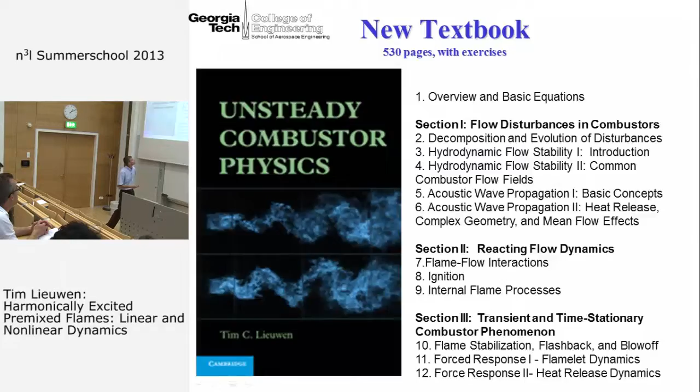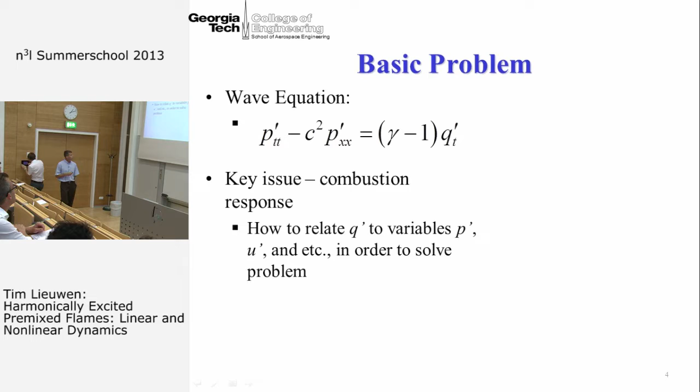If you really distill it down, the basic problem can be boiled down to a wave equation, which I have on the left side here, being excited by a source. Really one of the key issues in understanding combustion instabilities is understanding the combustion response, the sensitivity of unsteady heat release to flow disturbances in the system. So how do we relate Q prime, where Q prime is my unsteady heat release, to fluctuations in pressure and velocity and so forth. Once we can do that, then we can solve this wave equation.

By the way, I always wonder - I don't know what happens in Germany, but in the United States, students sleep in the first talk after lunch, especially now that the lights are dim. In fact, I slept when I was a student. So now when I teach, I always tell people I understand everybody has a hard day, and I let 2 people sleep, but only 2. The third person, I tell them they have to coordinate among themselves and say who's going to sleep, because then I start to take it personally if there's more than two people sleeping at any given time.

So the focus of this talk is the sensitivity of heat release to flow disturbances. By flow, I'm talking about velocity, mass flow rate. If I have fluctuations in the flow, how does this lead to oscillations in heat release? This is the question I want to dig into.

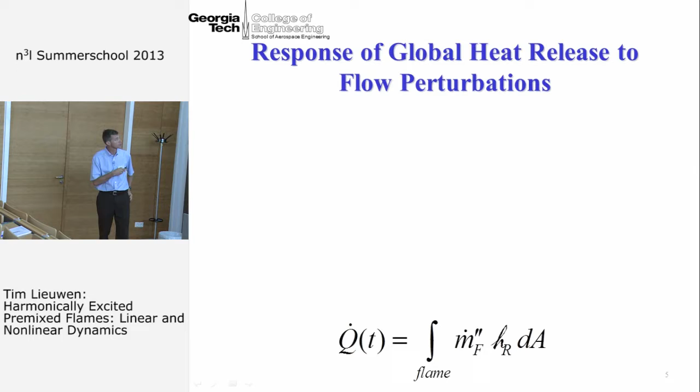So I'm going to talk about the local response of flames in the first half of this talk—when I perturb a flame, what is the space-time dynamics of the flame sheet position? Then I'll talk about the global response, which is the spatial integral. There are lots of questions we can ask, and I'm only going to barely scratch the surface.

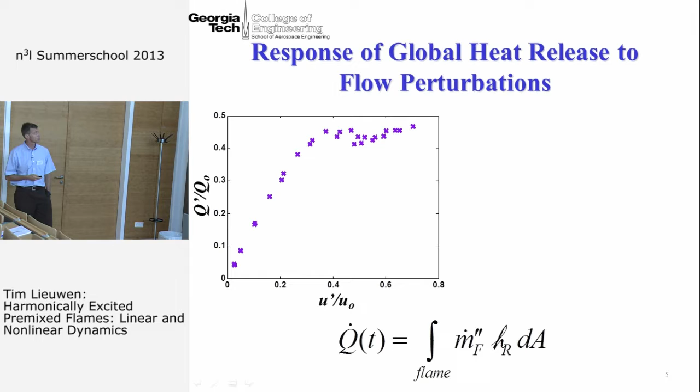I know a number of things that Dr. Paschereit later today is going to be addressing, as well as others tomorrow.

In a nonlinear situation, in this particular case, we have a very strong saturation. Why is it saturating? What are the physical processes? Why is it saturating at this amplitude—in this case, about 40% of the mean heat release? But other data might saturate at 10%, or in other cases up at 100%. So why at that amplitude? These are some of the questions we're interested in addressing.

Professor Polifke asked me to provide some background on the basic equations we're going to be using. Before I talk about flame dynamics, I want to take a quick sidelight and walk through the analytical tools and governing equations we'll use to look at these dynamics.

What I'm going to do is work within the fast chemistry limit, assuming I'm working within the flame-let approximation. So in a premixed flame, that means the flame is a very thin sheet, and I'm basically going to collapse all the complex chemistry into a discontinuity.

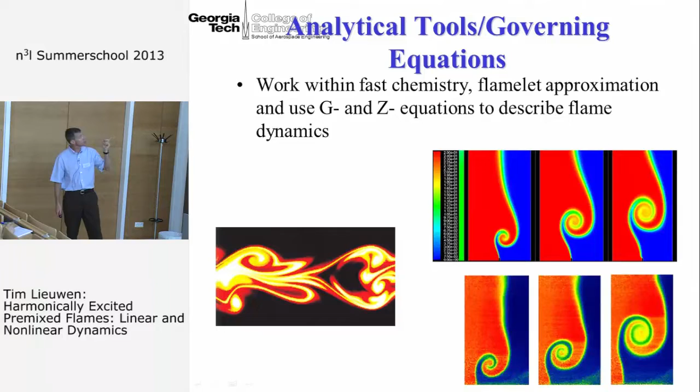And in the non-premixed flame, it also is a thin sheet. So I'm going to use the G equation to describe the premixed flame and the Z equation to describe the non-premixed flame, and I'll explain to you what those are. Just a very quick derivation: the Z equation is going to be my equation to understand non-premixed flame dynamics.

The key assumptions I'm going to be making for this analysis are, first of all, I'm going to assume Lewis number is 1 and that the flame occurs at the Z stoichiometric, or the stoichiometric mixture fraction surface. So Z is my mixture fraction. And I'm also going to assume equal diffusivities.

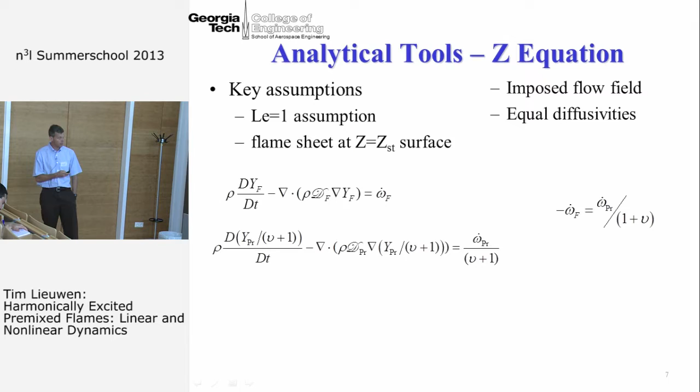And as I'll mention later, the first studies that I'm aware of that use the Z equation to understand the dynamics of non-premixed flames responding to harmonic flow disturbances was actually the work of Professor Sujith. And then actually applied to understand systems by Professor Juniper, both organizers of this meeting. So that's the Z equation.

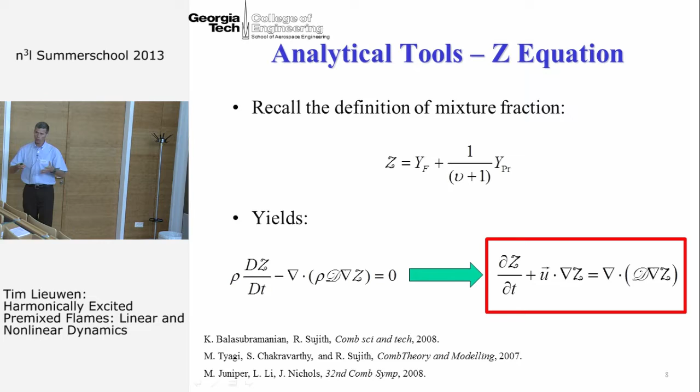So I want to understand, in essence, what I'm looking at is if I perturb the velocity field, this U, how does the flame both locally respond, how does the Z stoichiometric surface respond, as well as how does the heat release respond. Now I can do the same thing for a premixed flame.

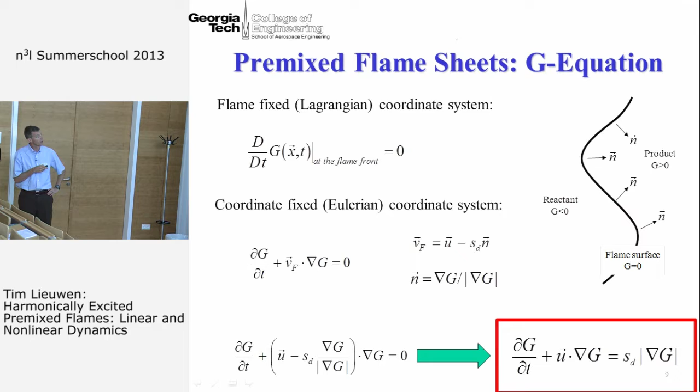And there I'm going to use what's called, and these letters are made up, but I'm going to call it the G equation, for historical reasons. In the G equation, again, I won't go through the derivation, but basically what I end up with is an equation of this form, which describes this scalar field G, and the flame is described. All the interesting stuff, all the chemistry, is packed into this surface right here, which is where G is equal to 0. In the reactants, G is less than 0, and in the products, G is greater than 0.

But it's important to realize, and I'll get into this in a minute, in a non-premixed flame, Z is physically meaningful everywhere. It's the mixture fraction. The mixture fraction is the amount of mass of stuff that originated in the fuel jet normalized by the total mass. In contrast, the value of G doesn't really have a physical correspondence when you're in the reactants or the products. It only has physical correspondence at the flame, where G is equal to 0.

So this is an equation that describes the propagation of this scalar field G, and then what I need to do is extract where G is equal to 0 to figure out where the premixed flame front is. And again, what I have is a convection operator on the left-hand side, which is just the flow velocity pushing around iso-G surfaces.

And then, as opposed to the non-premixed flame where I had a diffusion operator on the right-hand side, here I have a propagation operator. So S_D denotes basically the flame speed, the displacement speed, the speed of the front. And this mag-grad-G basically means that the front is propagating normal to itself. So at every instant, the front is propagating normal to the G equals 0 surface.

So one more simplification that we're going to make for the G equation: I'm only going to look at two-dimensional flames for this discussion. And the other thing that I'm going to do is, here's a sketch — this is an instantaneous position of my flame. I'm going to assume that the flame position is a single-valued function of the coordinate y, so then the flame position is given by this function xi of y and t. Obviously, if the flame was rolled around and wrapped around, I couldn't do that if it was a multi-valued position.

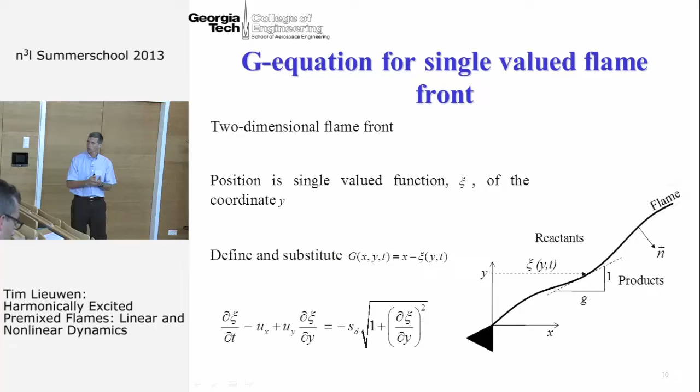So, kind of a nasty nonlinear right-hand side. This is my flame propagation term, and this is the part that describes convection of the front by the flow. So we have convection of the flame getting moved by the flow on the left side, and the flame propagating normal to itself on the right-hand side.

If we take these two equations, it's interesting to compare and contrast them. On the left side, you can see we have the same convection operator — they basically look the same. And what that tells us is that wrinkles are created on these surfaces, either on the G equals 0 surface or on iso-Z surfaces, by velocity fluctuations normal to iso-G or iso-Z surfaces.

The right-hand side, things look different. We have the diffusion equation, a diffusion operator — this is a linear, or at least a quasi-linear operator. Whereas the premixed flame shows a very strong nonlinearity here, and this describes, as I mentioned, flame propagation.

Something interesting is that the right-hand side of both of these equations becomes essentially negligible in the non-premixed flame, in the Peclet number much, much greater than 1 limit. So when characteristic velocity times a characteristic length scale, divided by the diffusivity, becomes very large, this term becomes pretty small. Or in the premixed flame, when the flow velocity is much, much greater than the flame speed, this also becomes negligible, at least in certain regions in space.

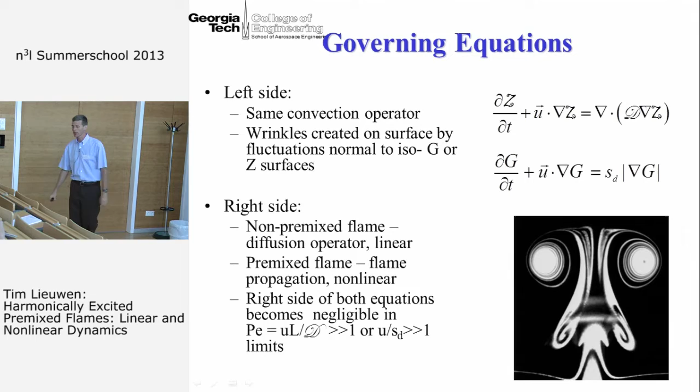So what that means is in that limit, these equations are actually quite similar, and we can expect some similarities in the space-time dynamics of the flame position in these limits, as I'll show you from some exact solutions later on. But as I'll also show, the fact that there are some analogies or similarities in the local space-time flame position dynamics does not necessarily mean the dynamics of the heat release are the same — they're controlled by totally different features.

One other point I want to make, and I mentioned this already, let me make it one more time: the G equation is only physically meaningful at the flame surface, where G equals 0. That allowed us to make the substitution we did here. But notice that this substitution is, in essence, arbitrarily assigning a value to G away from the flame position.

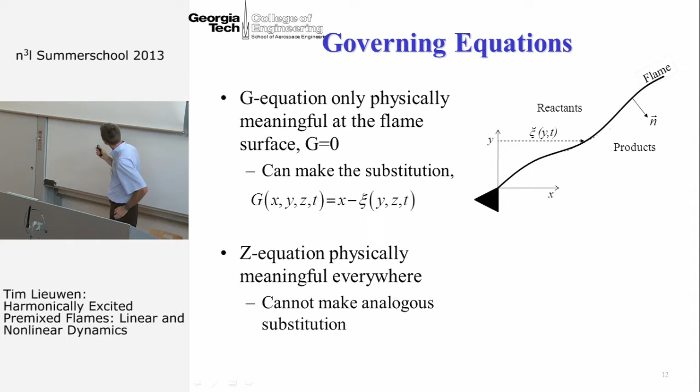G is less than 0 in the reactants, greater than 0 in the products, but I'm arbitrarily assigning some value of G. I can't do this — I can't make this substitution into the Z equation, because I'd be assigning a value to Z away from the flame, and I can't arbitrarily assign a value to Z. I've got to solve for the value of Z.

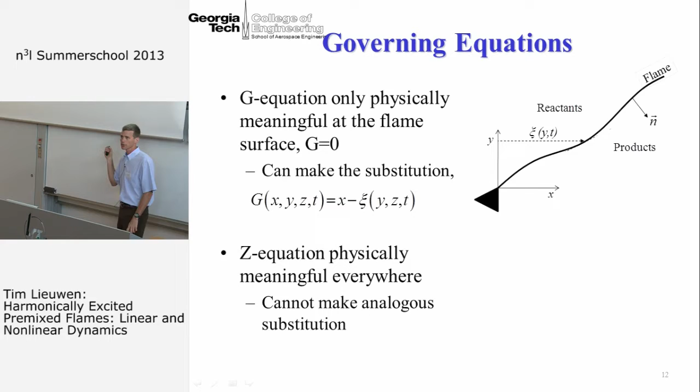So although the G equation is actually this nasty nonlinear equation, a nice simplification is that I can explicitly solve for the flame position in this 2D, single-valued approximation — I can write an equation for the flame position, xi. You cannot do that in the non-premixed flame case. The Z equation is physically meaningful everywhere, so you can't make an analogous substitution. That really reflects a fundamental difference in the problem.

Okay, so that's just kind of a quick overview of the governing equations.

I just threw in one last slide, some references for you to look at, which really walk through the approach that I'm going to use, and I wanted to point them out to you. These are some milestone studies, and I'm probably missing one or two here, but these are ones that jumped out at me as I was preparing this.

First of all, there's a very nice work in Markstein's book, Nonsteady Flame Propagation, where he basically, for the first time, derived the G equation. Forman Williams made it rigorous in 1985, but Markstein was the one who really presented this equation which you could use to start solving for flame sheet dynamics.

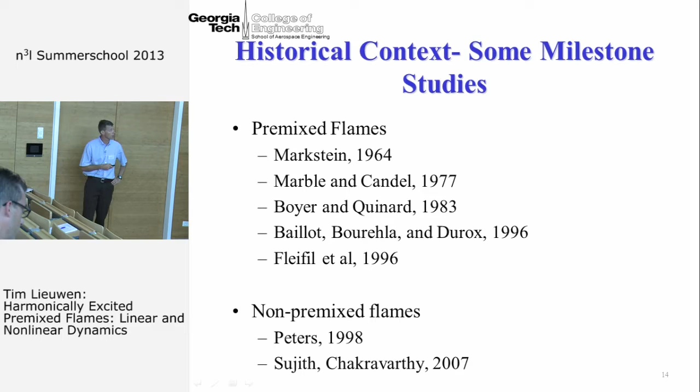And then in non-premixed flames, first of all, the work of Peters to rigorously develop this Z-equation framework within the flamelet approximation, and then Sujith and Chakravarthy at IIT Madras to actually use it to understand how flames respond to harmonic flow disturbances.

Okay, so with that as background, the rest of my talk is organized into three parts. I want to talk about premixed flame local dynamics, then non-premixed flame local dynamics, and then I'll talk about global heat release dynamics.

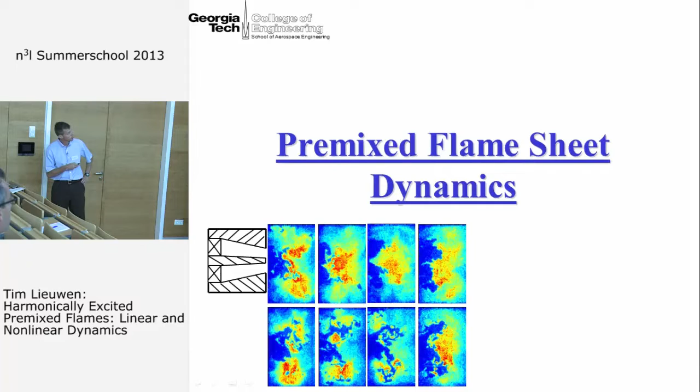So first we're going to talk about space-time dynamics. This is a much more complicated situation than I'm going to talk about. This is some OH PLIF images of a swirl flame. But if you think that instantaneously the flame is this interface, what are the factors that control the space-time fluctuations of the flame as we evolve in time? That's what I want to talk about.

If we go to a higher amplitude of excitation, it's very clear here to see the coupling of the flame with hydrodynamic flow instabilities. You're really strongly exciting the Kelvin-Helmholtz instability of the shear layer, which is strong enough to actually start whipping the whole flame around and rolling it up. And you can see, as you watch this, the action of kinematic restoration, which is the propagation of the flame normal to itself, smoothing itself out as you move downstream.

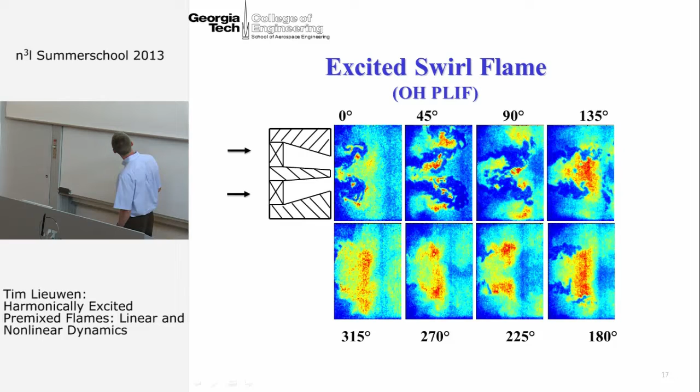So these are just some typical images of what harmonically excited flames look like. As I said, they can look a whole lot more complicated. This is a swirl flame with an OH PLIF image. I really like this one right here. You can see the large-scale roll-up of the flame, the Kelvin-Helmholtz instability of the outer shear layer right there, and the Kelvin-Helmholtz instability of the inner shear layer right there. This is a lot more complicated though than I'm going to get into with these swirl flames.

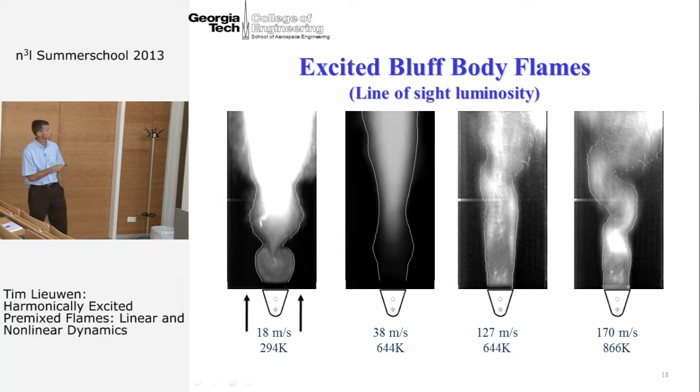Okay, so here what I have is a bunch of different images. These are actually at a whole bunch of different flow velocities, ranging from 18 to 170 meters per second, axially excited. And what we're going to start doing now is looking particularly at the flame edge itself. So I've drawn in a line here which denotes the flame edge.

And if I were to extract a whole bunch of those flame edges and overlay them, they would look something like this. At the very high velocities, that overlay sort of looks like what you might expect from a high turbulence intensity flame, which is basically the turbulent flame brush upon which is superposed the harmonic wrinkles.

You can see this turbulent flame brush growing as you move downstream. This is what you would expect if you just were exciting a flame with turbulence, as the flame brush grows monotonically as you move downstream.

This is a little bit more interesting. You don't have as much turbulence here at 18 meters per second, so it's a little bit more complicated. You can see there's this growth region, then actually the magnitude of the flame brush is getting narrower as we move downstream.

So that's kind of an interesting result, and we're going to explain what's happening there as well. But these are some images just to give you a feel for what's happening. So now let's start quantifying this.

So now I've turned my flow sideways. Flow is going left to right. And I want to quantify the instantaneous edge of the flame by this variable L. I called it zeta before - like I said, I'm going to go back and forth. L is a function of x and t.

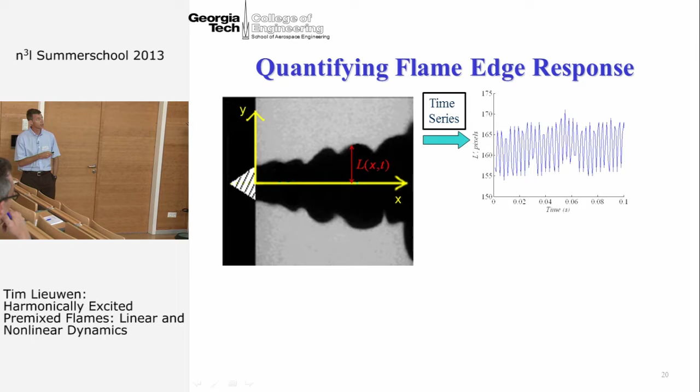And at a given x, L is oscillating. So this is L plotted as a function of time, and you can see it oscillating in time. If you take a spectrum, you can see a very sharp peak. In this case, I was exciting the flame at 300 hertz.

And what we can do then is we can start looking at how these spectra evolve as you go downstream. So now I've added a dimension to that plot. We have L prime and frequency - that's what I just showed you. Now I'm going to add another dimension, which is x, axial distance. And it looks something like this.

So what this is telling me is this envelope, which I can drop right there, is the magnitude of the fluctuations as a function of space and frequency. Notice the non-monotonic spatial dependence of this magnitude. You can see it goes up, and in this case it comes down. Very strong response at the forcing frequency.

And this actually is kind of reminiscent of that overlay that I showed you a minute ago, where the flame brush is attached at the flame base - it's not really moving much. The magnitude of wrinkling is going up, and then it's coming back down in this result.

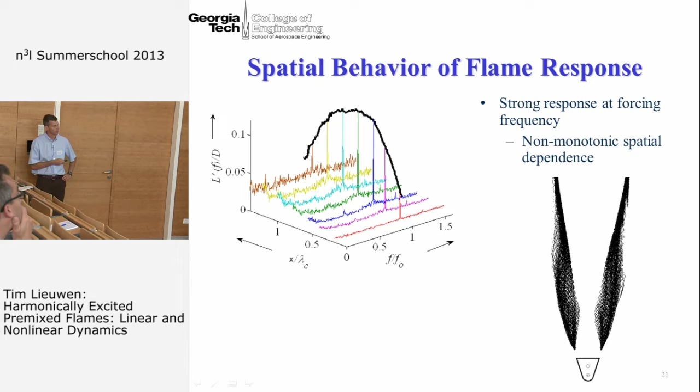And so here I have another result. Now I'm collapsing dimensions again - I'm only going to show you the magnitude of flame wrinkling at the forcing frequency. So here's L prime as a function of downstream distance, and you can see it going up and coming down. Here I'm showing you the phase as a function of downstream distance. You can see a very linear phase dependence, which is telling me - well, actually I'll get into that in a minute.

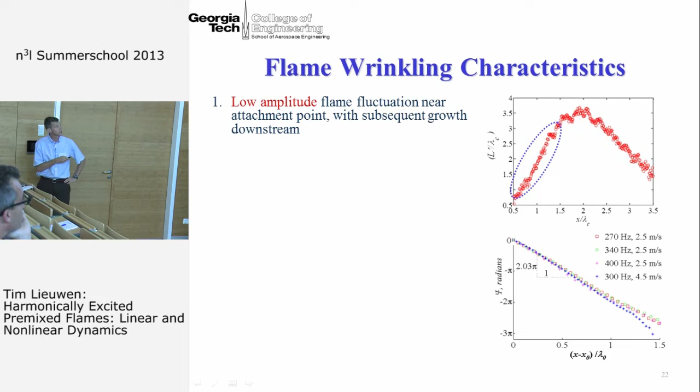So you can see there's very low amplitude fluctuations near the attachment point. It grows as we move downstream. There's some peak - the magnitude of flame wrinkling is peaking at some location, and it's decaying as we move downstream. And then if we look at the phase, it's approximately linear in distance, which is telling me that the wrinkle on the flame is moving at a nearly constant velocity with downstream distance.

The slope of this curve is directly proportional to the speed with which those wrinkles move - you could see in those movies, you could see the wrinkles moving downstream. The velocity of those wrinkles you can directly extract from the slope of that curve.

Now, this is kind of a simple one, an easy one. But these gain curves can look a lot more complicated. Just to illustrate, these are two other gain curves from some other conditions. Again, L prime is a function of downstream distance. Notice that you see the same general envelope - it starts near 0, goes up and comes down.

But now you also see this shorter wavelength modulation of flame wrinkling. All right, so that's an interesting one. And you can really see it in this one - this almost looks like a standing wave.

So you can see the flame wrinkling - that flame is really not flapping around much at all here. It's flapping around quite violently there, or there, or there. But there's kind of this node, antinode type response. But this isn't acoustic waves - this is the flame position.

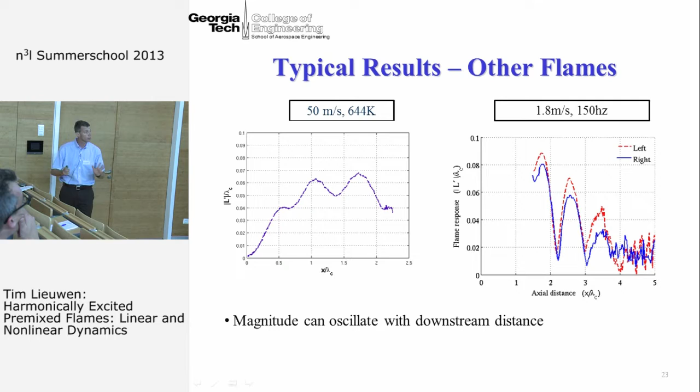Okay, so I want to understand this. There are really four things going on here, so I'm going to walk through these four things. And the first one is wrinkle convection.

In order to understand wrinkle convection, it's easiest to look at the impulse response of the flame. For those of you who had combustion, if you think about it, we all know that if you take a premixed flame in a flow with a spatially uniform bulk velocity UA, the flame settles at some angle, so sine theta equals SL over U. That's kind of an equation for the flame position.

But I want to look at its impulse response. At time zero, I'm going to make a step change of the velocity from a value of UA to UB. That's going to change the flame angle. The flame is going to be at one angle, and if I increase the flow velocity, it's going to change to a new angle. But the question is, what's the transient look like? How does it respond? Does it swing out, or what does it do?

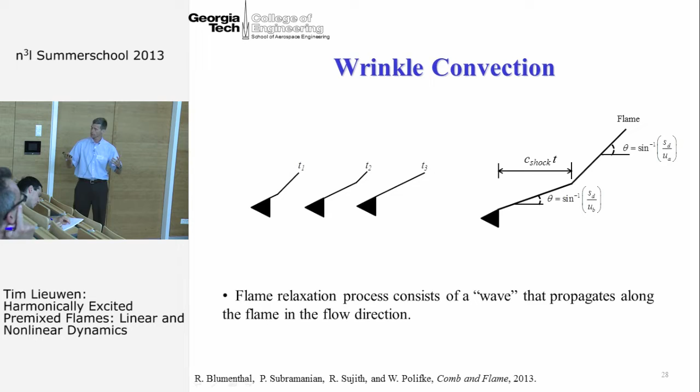And the speed with which the wrinkles move downstream, I'm going to call that speed UT. In order to understand why this speed UT is different than the flow velocity, we can look at this construction. Here the flow is moving downstream at a speed of u naught, so the flow is pushing the flame downstream at a speed of u naught. But the flame is propagating normal to itself at a speed of SL. And so if we just do the vector addition of u naught plus SL, we get UT.

UT is the speed with which wrinkles are moving along the front. So it's a function of both the flow velocity and flame propagation, which control this wrinkle relaxation process.

And so just an important point here: to illustrate this, what I have is a graph of normalized convection velocity—some velocity, which I'll talk about in a minute, normalized by the flow velocity as a function of downstream distance. So if it has a value of 1, this thing's moving at the mean flow velocity.

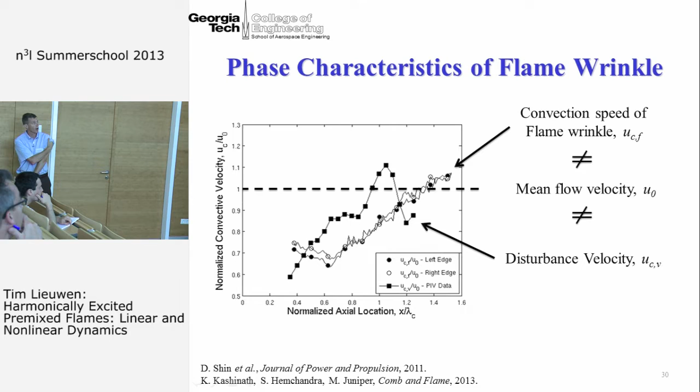And just for fun, I've also overlaid—we had PIV data. This plot right here is the convection speed of the vortex, which was exciting the flame. Notice how the convection speed of the wrinkle is not the same as the flow velocity, which is not the same as the excitation source, the vortex exciting the flame. So you have these three characteristic velocities floating around in the premixed flame problem. And as I'll show you, a lot of the really interesting interference processes occurring on flames are because these things aren't moving at the same speed.

Okay, so let's go back to that harmonically oscillating bluff body, that Peterson and Emmons plot. If you sit down and solve that with the G equation, and if you linearize the equation, turning off the nonlinearities, assuming very small amplitude wrinkles and a constant burning velocity so the flame speed is fixed, then when you harmonically oscillate that bluff body position, you're exciting the flame position at x equals 0. This plot shows you the magnitude of the flame wrinkling as a function of downstream distance. It's kind of boring, it's constant.

So what that tells you is the flame basically looks like a traveling wave response. If I have this harmonically oscillating bluff body, I excite a wrinkle, and that wrinkle just moves downstream at the speed I called UT or UCF. But the magnitude of the flame wrinkle does not change as I move downstream. This looks quite different than the data I showed you earlier, so there's more we're going to need to account for.

The phase looks something like this. You get this linear phase roll-off, which actually doesn't look too different from some of the data. This linear phase versus downstream distance is that wrinkle convection process, which I'm emphasizing here. And as I'll talk about later if I have time, if you want to understand why flames act as a low-pass filter, why the heat release acts as a low-pass filter, it's all driven by this curve right here.

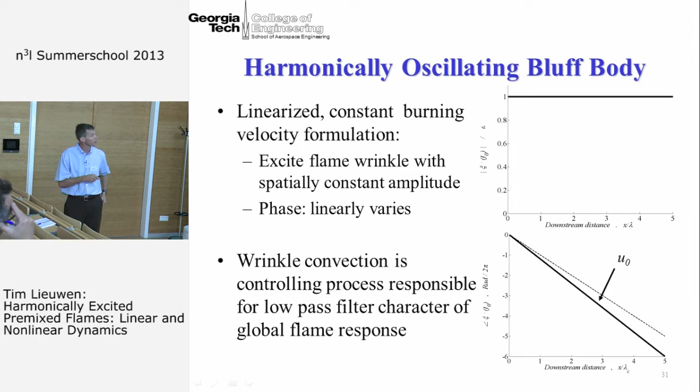Okay, so I've talked about wrinkle convection, what happens once you create a wrinkle, what happens to it in the linear approximation as the wrinkle just moves downstream along the flame. Now I want to talk about how do you excite these wrinkles on the flame front.

In order to do this, I want to go back to the equation for the flame position. Here I've written it in terms of, instead of zeta prime, L prime, but again it's the same thing. Rather than solving for the flame position itself, it's a little more convenient to look at the slope of the flame position, so here I'm looking at dL prime by dx. This is basically an equation for the fluctuations in slope of the flame position.

And if you solve that equation, you get this thing, all right? It's a convolution integral here, and this is the particular solution. This is a term which is a function of the fluctuating velocity at x equals 0. This is the homogeneous solution, and I'm going to talk about these in a minute.

So what I've done here is a linearized solution of the G equation. I've assumed that, and I've also assumed an anchored flame - that the flame position right there does not move. As the flow is moving back and forth, the flame stays fixed, it stays attached.

First of all, you can clearly see wrinkle convection. Notice these delay terms - t minus x minus x prime over ut, t minus x over ut. This is that wrinkle convection showing right up there, and I talked about that before. What you can also see is that the velocity, which is a vector, only shows up in scalar form in the G equation. All that matters is what I'm calling un prime here - the fluctuating velocity normal to the front. So the flame doesn't care about the vector velocity field; it cares about the scalar component of the velocity normal to itself at that position.

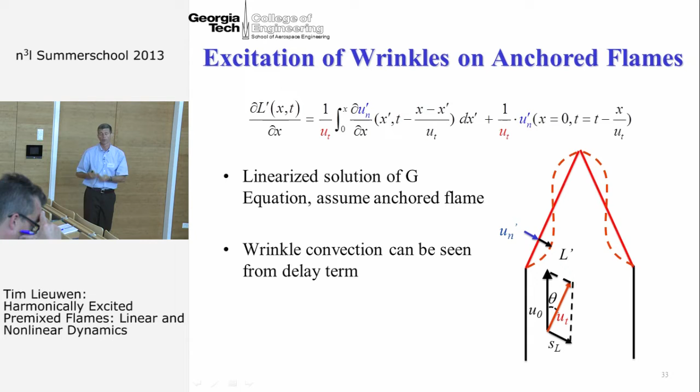So I want to break this down into two pieces. First I want to assume that I have a bulk disturbance field, a disturbance field that does not vary spatially - the disturbance field only varies in time. So the whole flow is just sloshing up and down. This might be an approximation for a flow where I could somehow suppress the excitation of hydrodynamic flow instabilities, and I just have a really long wavelength acoustic disturbance, just knocking the flame back and forth.

In that case, this whole term goes away, and I'm left with just this term right here. What's interesting about this is that the remaining term is only a function of the fluctuating velocity at the attachment point, at x equals 0.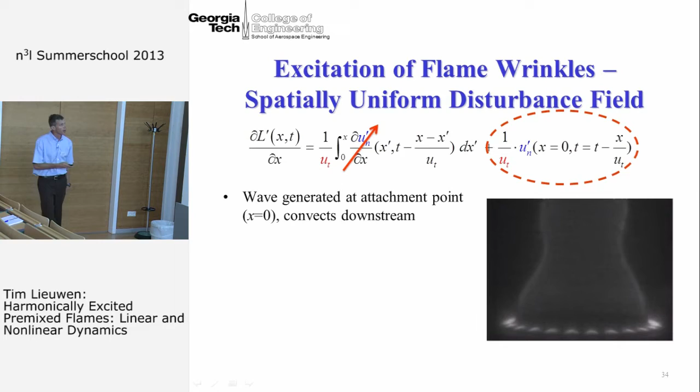Okay, so what's happening here is that this fluctuating velocity, if you look there, you'll see the oscillatory flame angle at the attachment point. This is a circle of pilot flames to hold this flame on. You see the flame oscillating, and if you can put your Lagrangian point of view eyes on and just watch that wrinkle, it'll propagate downstream. You can watch it with essentially fixed slope. So that's that term right there.

And so one thing that's interesting about this is it shows you that if the excitation velocity is spatially uniform, the flame response is exclusively controlled by what's happening at the attachment point, at x equals 0. This is what I'm calling the flame anchoring boundary condition.

So here I assume something simple. I said the flame's attached, it's fixed, it's not moving. But if the flame was moving, that motion at the attachment point is what's controlling the entire problem, what's happening at every other point in space and every other point in time. And so kinetic effects, diffusive effects, heat loss effects, all the stuff that controls flame anchoring and flame stabilization, although I haven't explicitly talked about it, that's going to control that.

You basically have an edge flame right there. All those edge flame dynamics are very important, and this is where it would show up, that these anchoring boundary conditions are important. They really, really matter.

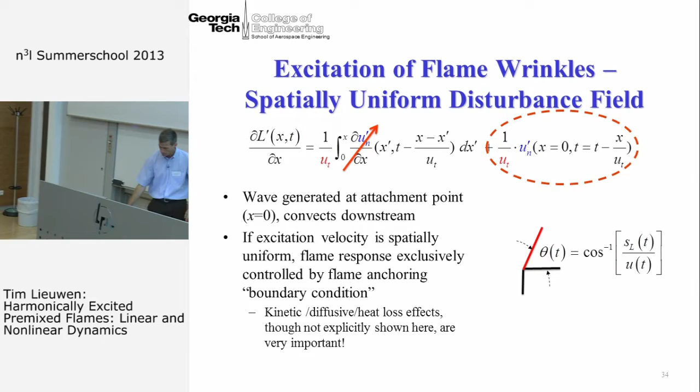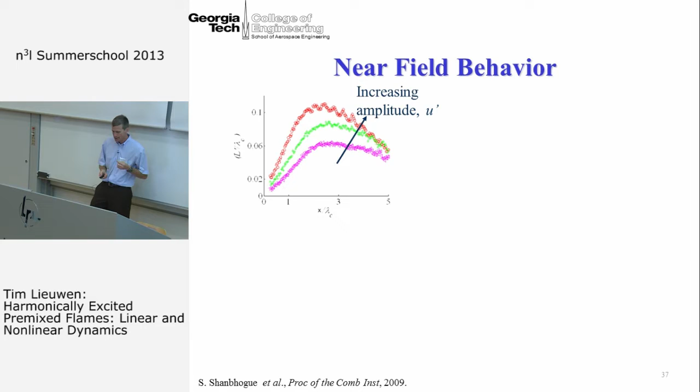Okay, so now let's, I'm starting to talk too slow, so I'm just going to jump over some stuff. The other point I want to quickly make is that because the flame is starting out with basically negligible wrinkling, what I'm going to call the near field dynamics, what's happening to the flame space-time dynamics near the flame attachment point, is basically linear in amplitude.

So there's going to be lots of discussion around nonlinearity and things like that. The flame nonlinearity accumulates with downstream distance. It's actually very much like acoustics with shock waves, where nonlinear effects accumulate as you propagate downstream. Same way, flame propagation, which is the key nonlinearity for premixed flames, those effects accumulate with downstream distance. And so nonlinearity is not uniformly felt over the flame. The near field dynamics are very, very linear.

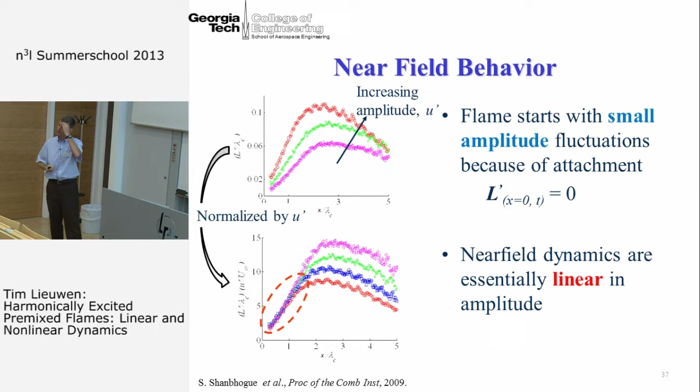Just to show you, this is a plot of the magnitude of the flame wrinkling L prime as a function of downstream distance. You've seen this plot, this red one, before. But here now what I've done is I've overlaid three different amplitudes, and you can see they're all starting near zero and rising. But if you take this same data and normalize it by U prime, notice how all the results collapse in the near field. So near the flame holder, the flame is pretty linear. Even at high amplitudes, the region of linearity collapses to a region that's closer and closer to the flame holder as you move up in amplitude, but it stays linear near the attachment point.

Okay, so I've talked about excitation of wrinkles. Now I want to talk about interference processes. So I want to go back to this equation that I showed you before. Before I had X'd that term out because I said, let's look at spatially uniform disturbances. Now let's think about what happens when the velocity fluctuations, d by dx, is non-zero. So what this equation tells us is that flame wrinkles are generated at all points where the disturbance velocity is non-uniform. And this is a convolution integral.

So this also shows you that the flame wrinkling at a point—if this is my flame attachment point, and this is a flame propagating—if I want to understand why the flame is wrinkling here, it's not just the velocity fluctuation here that's controlling it. It's a convolution of all the disturbances at every upstream point with a suitable time delay. The entire space-time history of the velocity field at all upstream points controls the flame wrinkling at a given position downstream. That's what this convolution integral is telling you.

So what I specifically want to look at is the case where the velocity field consists of a convecting vortex, which is a very interesting problem from a combustion instability point of view. The vortex is convecting at some speed uCv, and as we've talked about, there's really two velocity scales I'll focus on here, though I mentioned three earlier.

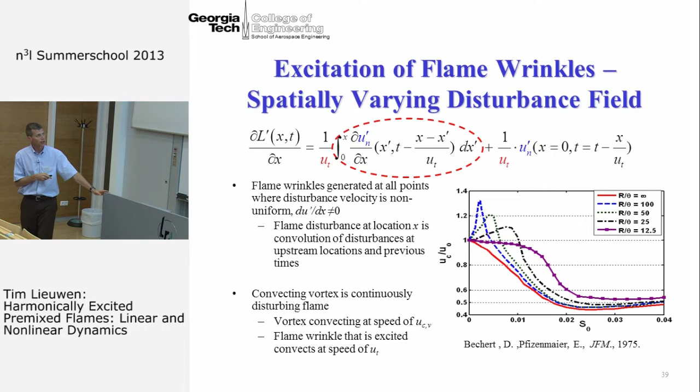Just to illustrate that, this is a JFM paper—actually one of the first papers to measure these very high velocity convection speeds of Kelvin-Helmholtz instability waves. This shows the convection speed of the vortex as a function of a shear layer Strouhal number for different boundary layer thicknesses.

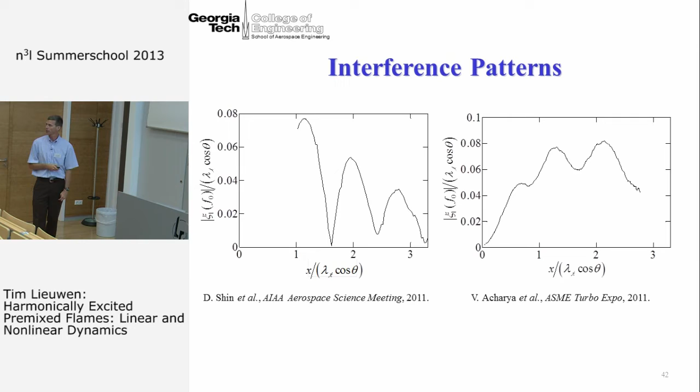Now, I want to make one more point here, and I want to emphasize that this interference effect is totally controlled by the fact that we have disturbances which are coherent in space and time.

If you sat down and solved a problem where you had a convecting disturbance but with a random amplitude - so just to simulate turbulence, you take turbulence and convect it through - this is the result that you would get. For example, here's the RMS value of the flame wrinkling amplitude, and this starts to look like turbulent flame brush growth. We know that turbulent flame brushes grow monotonically as you move downstream, and that's what's happening here when you have a random excitation.

But when you have single frequency excitation, you get this interference type behavior. And when you have a turbulent flame which is excited harmonically, you're going to get the superposition of that with that. If you think back to some of those images I showed you earlier, you could exactly see that.

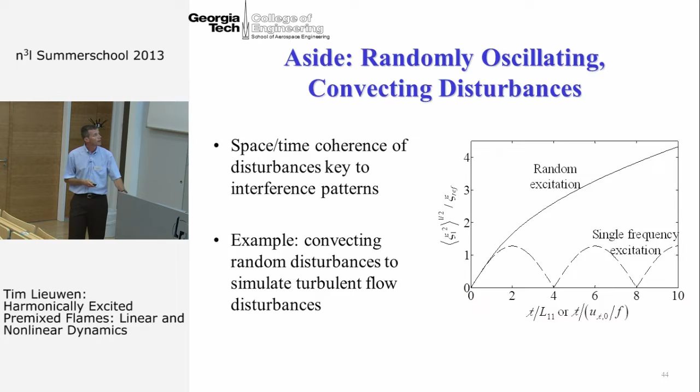Okay, so last thing I want to talk about with premixed flames is destruction of wrinkles. Why do flame wrinkles go away? Well, flame wrinkles go away because of the fact that premixed flames propagate normal to themselves, what's called Huygens propagation, and that is an intrinsically smoothing effect.

Here's an image of if you take a flame which has this ripple on it and you say, okay, let me just see what happens - let me let this flame propagate normal to itself. You get this destruction of flame surface area, and so this flame, given enough time, will look something like this.

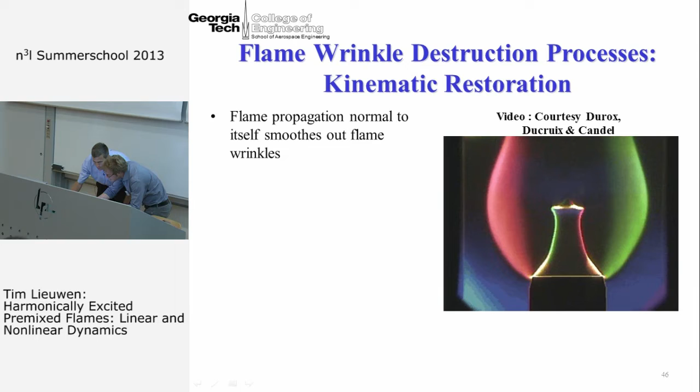This is a movie made by Daniel Durox, and I think this is the one that's not working, so I'm going to have to pull this video up. Sorry, just 1 second. Stop. Okay, sorry, all the movies are working except for this one.

I really like this video from Daniel and the group at Ecole Centrale, because you can really nicely see this kinematic restoration. You see this is a Schlieren image of a Bunsen flame, so you can really nicely see the almost spatially periodic disturbance. But then as you move this thing downstream, you can see this cusp appear, and you can see this destruction of flame surface area as you move downstream.

And so the flame becomes non-symmetric. The concave part and the convex part start to act very, very differently because one is propagating into itself - I can go back to it now - and the other is propagating out. And so you get a change in length scales as well, in that you start out with a disturbance with one length scale and you start creating longer and shorter length scale disturbances.

And the shortest length scale disturbance basically collapses down to the flame thickness, because you get this cusp formation where you basically get this discontinuity in derivative. Okay.

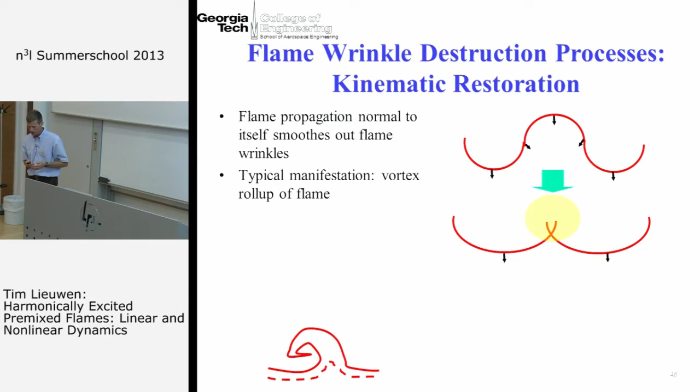The way this typically manifests itself in thermoacoustic instability problems is you get vortex roll-up. If you just take a passive scalar interface, it might roll up and look something like that. Or even a flame with a low propagation speed. But let this flame propagate normal to itself, and at some later time it won't look like this, it'll look like that. That's kinematic restoration.

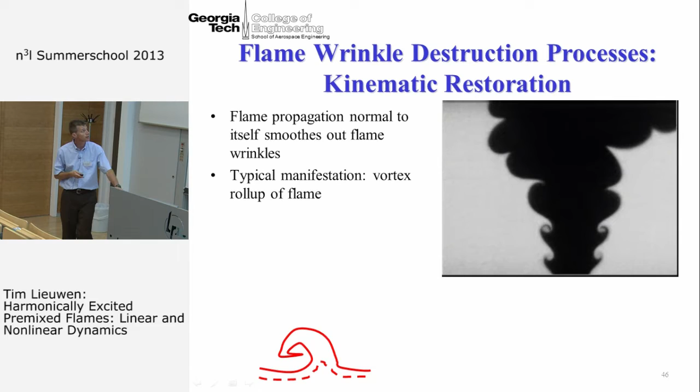I showed you this movie earlier, and you can very clearly see that kinematic restoration. A really strong vortex whips that flame around at the base. As you move downstream, it gets smoothed out. But this is a nonlinear effect. If you want to understand this effect, you have to turn on the nonlinearities. You can't just understand this from a linearized level set equation.

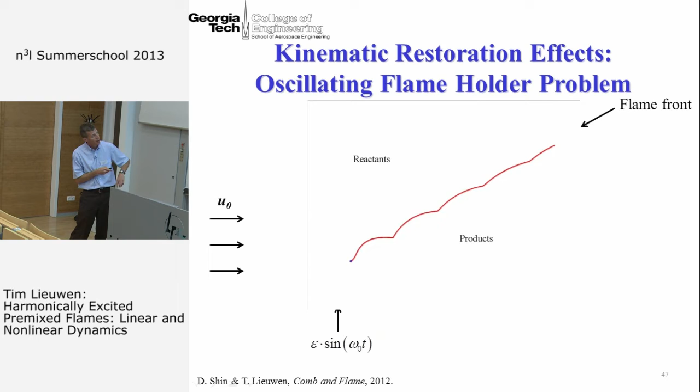So this process is very amplitude dependent, very strongly nonlinear. To dig into this a little bit, if we go back to that oscillating flame holder problem, here we turned on the nonlinearities. You can see the wrinkles being excited, and notice how the magnitude of the wrinkles is decaying as you move downstream. This is that kinematic restoration effect. You can see the cusp formation, but also the height of the wrinkles is decaying.

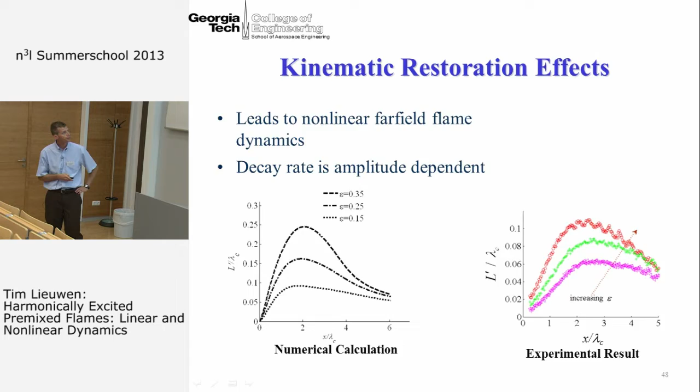I'm talking too slow and I can't fully explain to you why this is, but this is something you would theoretically expect, that all these results converge. In the near field or midfield region, you get different curves at different amplitudes, but far enough downstream, the results are all going to converge. You can actually see this in the data as well. If you turn off the normalization, notice how all these results, at different amplitudes, are all converging. This just explains why, and I'm not going to get into it.

I just want to very quickly glance over 2 topics. I've talked about why laminar flames with constant burning velocities, why wrinkles go away - it's from kinematic restoration. There are 2 other effects which also happen in real flames which also make wrinkles go away.

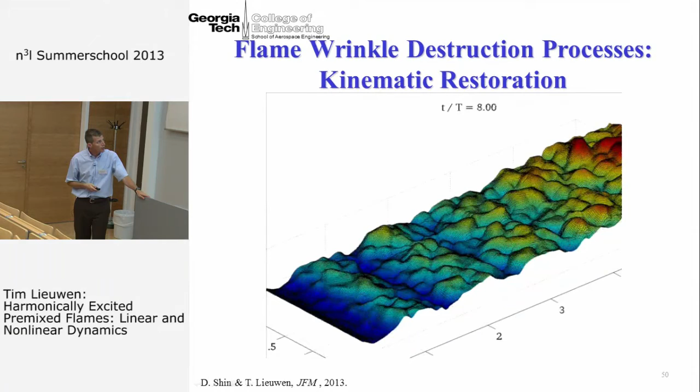The other effect that's interesting is that if you start thinking about non-constant burning velocity effects, the flame speed can start to modulate in time when the length scale of wrinkling gets short enough, because then flame stretch becomes important. Flames are sensitive to curvature, flames are sensitive to spatial inhomogeneities in flow velocity, and then you get flame stretch effects going on.

And you can see this is a Bunsen flame. You can see very short length scale disturbances, and notice how those wrinkles just go away as you move downstream. That's a flame stretch effect. So stretch effects, and you can understand this destruction of flame wrinkle processes from purely linear arguments.

This is a linear effect that makes flame wrinkles go away. For constant burning velocity flames, you have to keep the nonlinearities. If you have a thermodiffusively stable flame, linear effects also, but it's a high frequency effect. You've got to go to higher frequencies.

Okay, so all right, so that's premixed flames. Now I want to move to non-premixed flame sheet dynamics. And I want to start comparing and contrasting things. I'm going to go a little bit quicker here.

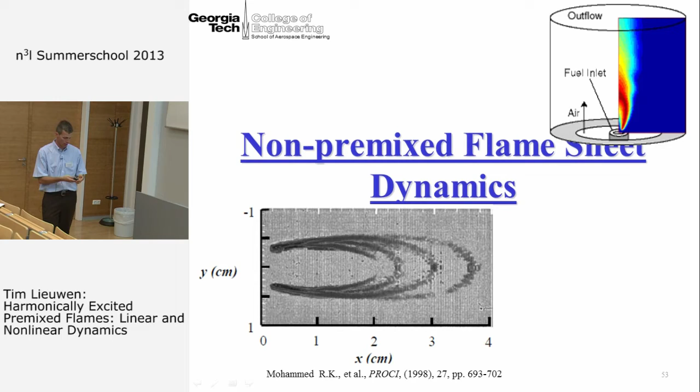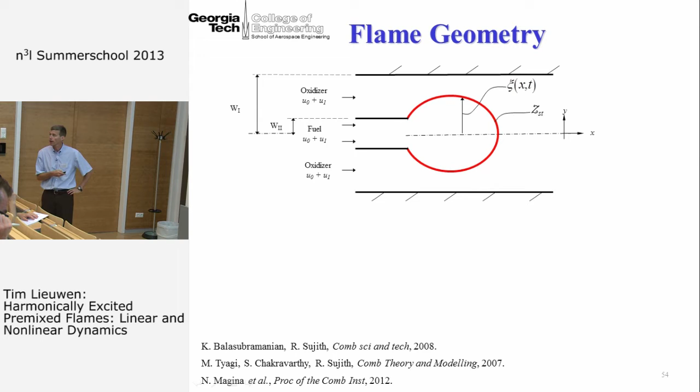Here what I'm going to do to illustrate this, I'm going to pick up a model problem from Sujith where we have fuel and oxidizer, a 2-dimensional flame, and I'm going to look at a flow where there's bulk forcing. So the flow is oscillating side to side like that.

And I'm going to show you some illustrative solutions in the Peclet number much, much greater than 1 limit. In other words, where this width of the burner multiplied by the flow velocity divided by the diffusivity is much, much greater than 1. This is an interesting physical limit.

Okay, so if you solve for the z field, all right, remember here now I can't explicitly solve for the flame position because of those differences I talked about. I just jumped right over it. I could for the premixed flame.

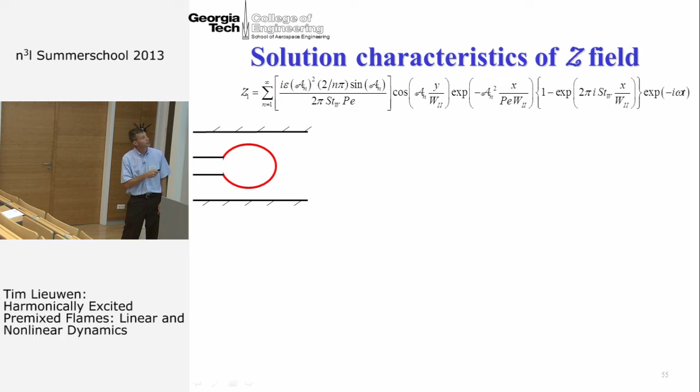So this is a solution for the entire field, so notice I have y, this is a 2-dimensional problem, so I have x, y, and t. They're all here. So this is the entire z field, all right? This is what the series solution looks like for the fluctuating mixture fraction. That's z1.

And this is a movie, and this just shows you a visualization. This is what that fluctuating Z field looks like. Can you see it moving around? Okay, so that's what it looks like, and you can see these wrinkles, and if you watch them, you can actually see them moving downstream.

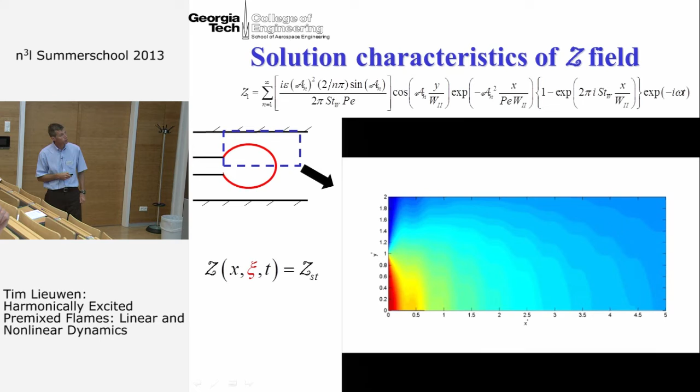What I'm really interested in, though, is the location where Z is equal to Z stoichiometric, because that's the flame sheet. All right? And there it is. There's Z stoichiometric. So that's where the reaction is going to collapse in this flamelet limit. All the action is going to be happening right there in terms of reactions.

So what I'm really interested in is what are the dynamics of this front. And that's a harder problem. So what I'm going to do here is this dashed line is the time averaged Z stoichiometric field. And I'm going to define this variable xi 1,n, which is the instantaneous fluctuation of the flame position normal to that.

All right, so with a little bit of math, what I can do is I can take this solution and extract, if I linearize this solution, I can extract the flame position. I have to do it after the fact. Notice that for the premix flame, I can write an equation explicitly for this. Now I have to extract it from the solution for the full Z field.

And here's what it looks like. All right, here's xi 1,n. So this is the fluctuation of the flame position. And you can see it goes as 1 on F. There's this low-pass filter characteristic. It's multiplied by sine theta naught of x. Theta naught is the instantaneous angle of the mean flame.

And so what this is basically telling you is that the local flame wrinkle only occurs through velocity fluctuations normal to the flame. Here is a convection operator in complex form. And this is telling you that flame wrinkles propagate with the axial flow. Notice that the speed of propagation of these wrinkles is the axial flow velocity. All right, so in an illustrative result here, what I'll show you, I can't remember if this is a movie or not.

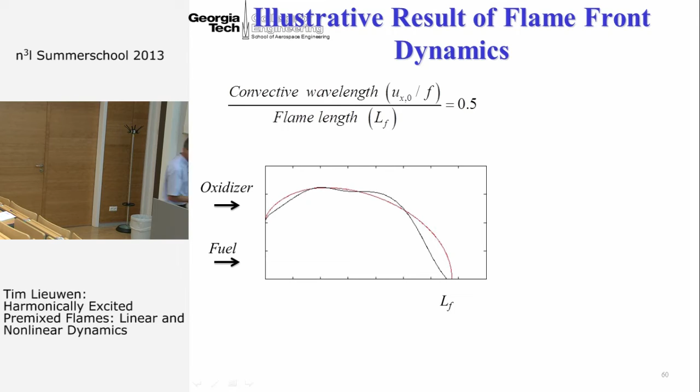Here is a higher frequency disturbance, where the convective wavelength is half of the flame length. Now you can see it's a lot more complicated behavior, and this shows you the gain curve.

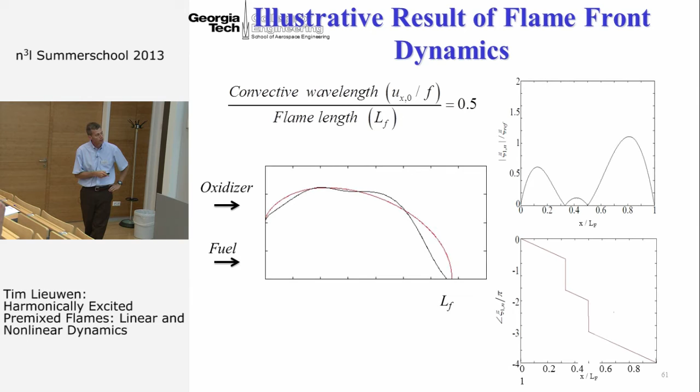Now we have 2 nodes, and notice this complicated space-time behavior — this complex spatial modulation in amplitude. There are 3 local minima and 2 nodes in the wrinkling. Then the phase is linear, with a 180-degree phase jump, linear, and so forth.

Notice that they both have the exact same amplitude, 1 on F feature. They both have this sine theta term. The premix flame theta is a constant, whereas for the non-premix flame, the angle is changing with downstream distance. You get a very similar looking convection operator.

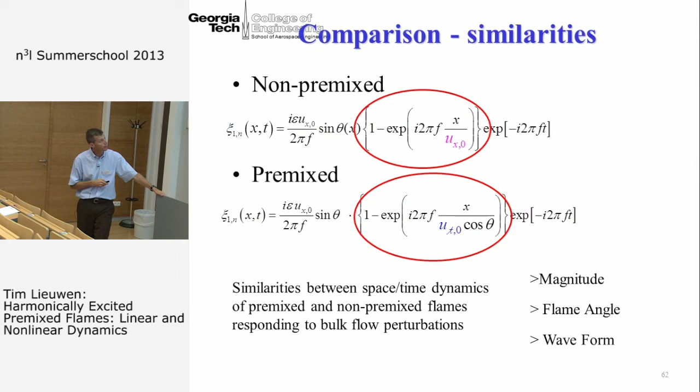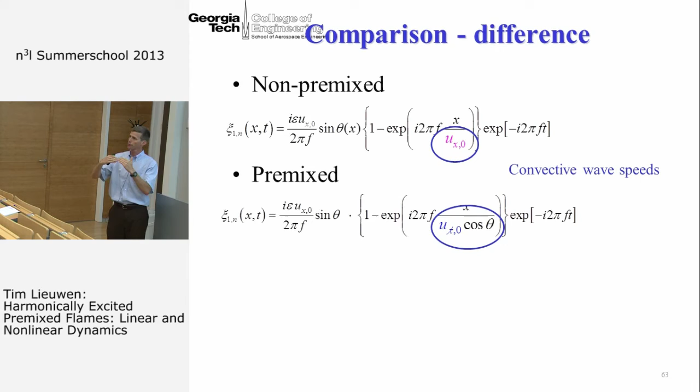The only difference is that the convection wave speeds are different: in a non-premix flame, this wrinkle is moving with the flow speed, whereas in a premix flame, it's moving with this vector superposition of the flow velocity and the flame speed, which gives you this U_T naught.

Okay, that's all I'm going to say about local dynamics of non-premix flames. So I've talked about why these flames wrinkle, what controls it for premix flames and for non-premix flames. Now let's look at the global heat release — what is the spatially integrated unsteady heat release?

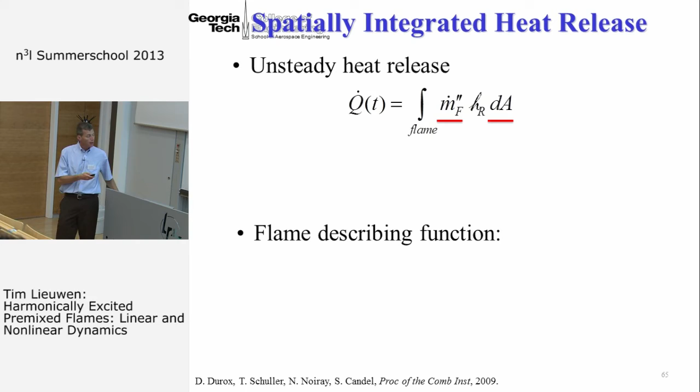This equation right here — I want to integrate over all these fluctuations and think about what's happening. In particular, there are two things I want to look at. First, there's the flame surface area: fluctuations in flame surface area are going to cause heat release to oscillate. This term right here is the mass burning rate — the rate at which the flame is turning reactants into products, fuel into products.

I'm going to assume, for these purposes, constant composition — so no fuel-air ratio fluctuations, or that the mixture fraction in the non-premixed flame problem is constant. I'm going to work within this flame describing function formulation, taking the unsteady heat release at the forcing frequency, normalized by the velocity at the forcing frequency. I'll decompose this describing function into two parts: what I'll call the weighted area and the mass burning rate.

The weighted area is basically due to fluctuations in flame surface area. Mass burning rate is due to fluctuations in mass burning rate. So if we start with premixed flames, here it is. The mass burning rate, I can write as the density of the unburned reactants multiplied by the consumption speed — the laminar consumption speed of the unburned reactant. So that's the mass burning rate for a premixed flame.

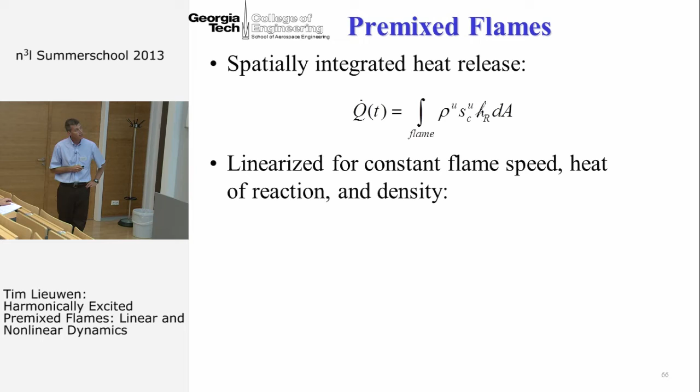So now, if I have a constant flame speed — so the consumption speed isn't varying, which it won't if there are no stretch effects and the composition is constant — this collapses to an integral of the flame surface area. The unsteady heat release of a constant burning velocity premixed flame is purely a surface area problem. To understand how the heat release oscillates, you need to understand how the flame area oscillates.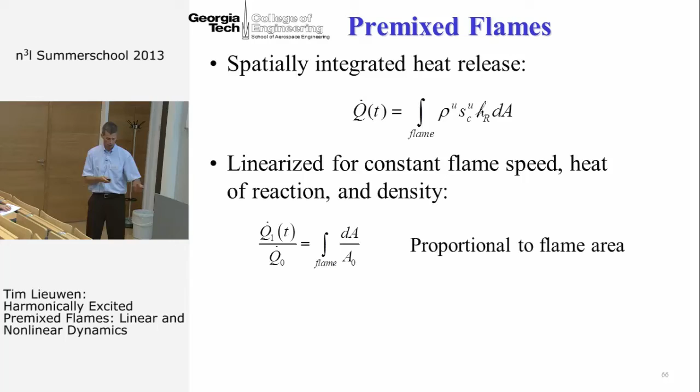So first question: why the 1 on ST roll off? Why do premixed flames roll off as 1 on ST? Well, you might say, you already told us that premixed flames have this low-pass filter characteristic. Here was a formula I put up earlier showing the fluctuating flame position.

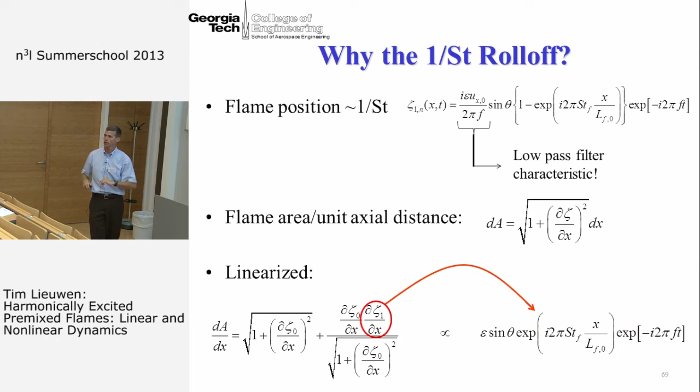So it's a bit more complicated than that. First point: premixed flames do not roll off as 1 on F because the flame position rolls off in 1 on F, because the flame area is flat in frequency space unless you start including stretch effects. Rather, what happens is there's another effect.

To illustrate this, consider a traveling wave disturbance. Take cosine of omega t minus x on u, integrate that over the flame length from 0 to LF. If you integrate that, you get a 1 on frequency. So this 1 on ST, or 1 on F, in the global heat release comes from the spatial integration. It comes from interference.

This goes back to the point I made about why this tangential convection of wrinkles on premixed flames is so crucial, because that is what controls its high frequency characteristics. When you take the unsteady heat release, what's happening here and here and here for a premixed flame, there's a phase delay, so when you add them up you get a 1 on omega, or 1 on frequency effect.

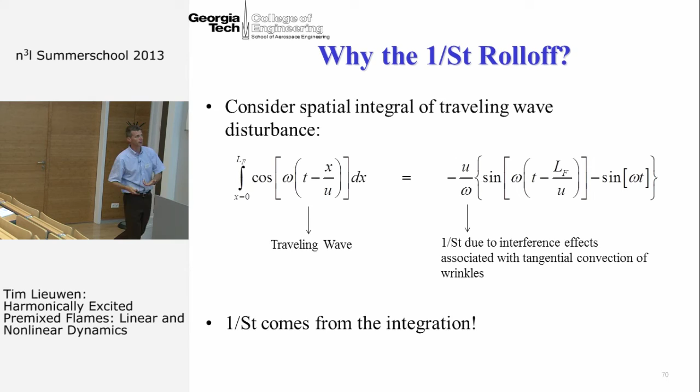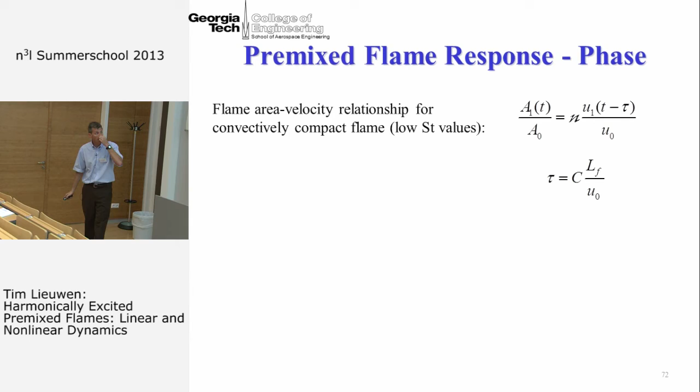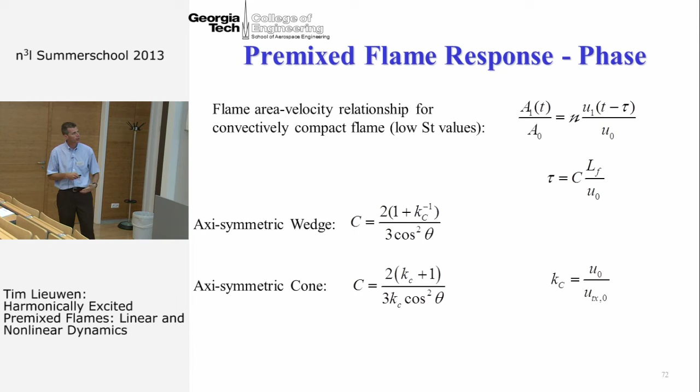You can show that for low Strouhal numbers, you can very rigorously derive what's oftentimes called an n-tau formula for the flame heat release. So the fluctuating flame area is proportional to the unsteady velocity multiplied by some gain n and some time delay tau. This was first introduced phenomenologically by Crocco and Cheng, but it actually has very rigorous application for premixed flames in the low Strouhal number limit, where the flame looks convectively compact. This value of n and this value of tau, you can derive expressions for, which I won't get into.

Okay, so that's premixed flames. I'm almost done here. Now let's talk about non-premixed flames, and start comparing the two. If I take a non-premixed flame and look at bulk flow excitation, here's my expression for the global unsteady heat release. Let me take this and linearize it.

Just to illustrate this, I've chopped this up into three terms. There's the steady state contribution, the time average burning rate times the time average area. Then there's a term here, which is basically the area fluctuation contribution, the integral over the flame of the time averaged burning rate per unit area times the fluctuating flame area.

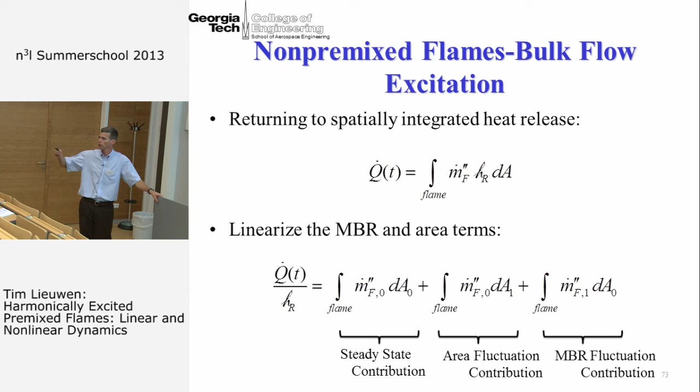And then you get another term, the mass burning rate contribution. This is the fluctuation in the rate at which the flame is locally converting reactants to products. For the premixed flame, remember, we only had this term unless you have stretch effects or fuel-air ratio oscillations. In a non-premixed flame, you cannot ignore this term, and that's what I'm going to show you.

So let's first start by looking at area. This is really interesting to start comparing and contrasting premixed and non-premixed flames. The transfer function of the weighted area - it's not just area, it's a weighted area, and let me explain why - if you're integrating over the fluctuating flame surface area, the fluctuating area at each axial point is weighted by the time averaged mass burning rate in that position.

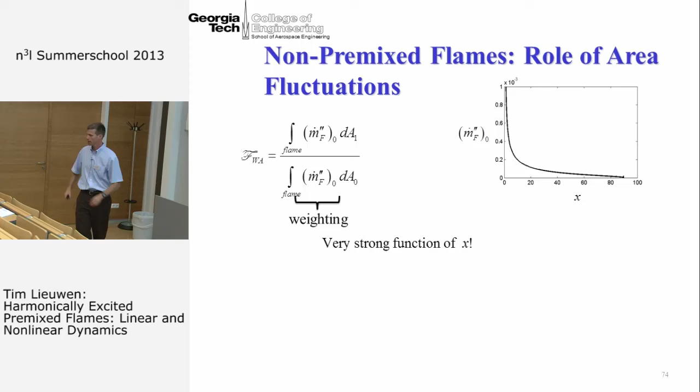Now if you think about a non-premixed flame, the time average burning rate is a function of downstream distance and varies strongly with position. Most of the mass burning rate in a non-premixed flame occurs right near the exit of the fuel port because that's where the gradients are highest. The mass burning rate of non-premixed flames is proportional to gradients. Gradients are strongest right near the fuel outlet. And so notice how this curve is not flat.

A premixed flame with constant burning velocity, this curve is flat. The mass burning rate is the same at every point along the flame. So the weighted area and the area are the same thing. In a non-premixed flame, you have to think about weighted area. Area fluctuations for a non-premixed flame are irrelevant. You don't care about what the area is doing in a non-premixed flame for heat release. You care about what the weighted area is doing. And it's because of these strong variations in mass burning rate that you see in non-premixed flames with position.

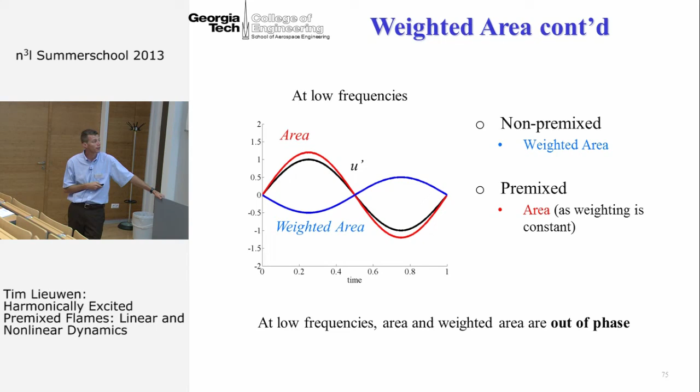So this just makes the point that I just said, that for low frequencies, as you oscillate the velocity, the area is oscillating in phase with the velocity. And so for a premixed flame, the heat release is oscillating in phase with the velocity. For a non-premixed flame, what we care about is the weighted area. The weighted area goes 180 degrees out of phase with the velocity. Okay, so that's what's happening to the area for a non-premixed flame.

Now let's look at the mass burning rate. This is what I call the mass burning rate transfer function, and it's the oscillations in mass burning rate per area. The mass burning rate in a non-premixed flame is oscillating because spatial gradients are oscillating in time. When you have spatial gradients oscillating, diffusion rates are oscillating, and the rate at which stuff is diffusing into that Z-stoich surface is oscillating.

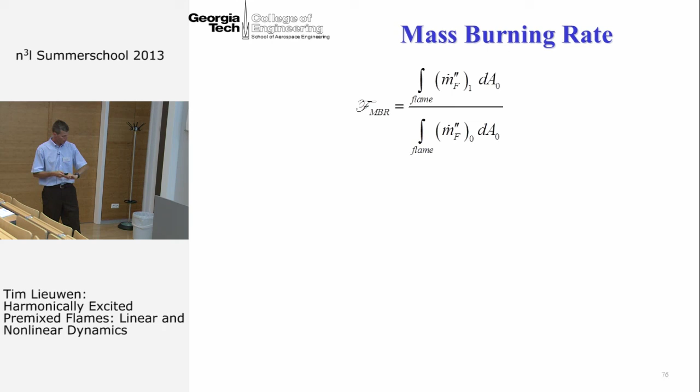So this equation just quantifies this. The fluctuations in mass burning rate are directly proportional to the gradients in the mixture fraction. Whereas for a premixed flame, mass burning rate oscillations occur through either the sensitivity of the flame speed to fuel-air ratio, if the fuel-air ratio is being excited, or the sensitivity of the flame speed to stretch, which becomes important at higher frequencies.

Which is the heat release. So the non-premixed flame also starts with a transfer function of 1, and by the way, it's for the same reason as for a premixed flame. You get these mass flow rate oscillations of fuel into the system, and the heat release in the quasi-steady limit is directly proportional to fuel flow rate, assuming you have excess oxidizer. So this transfer function also starts out at 1, but it's dominantly driven by mass burning rate.

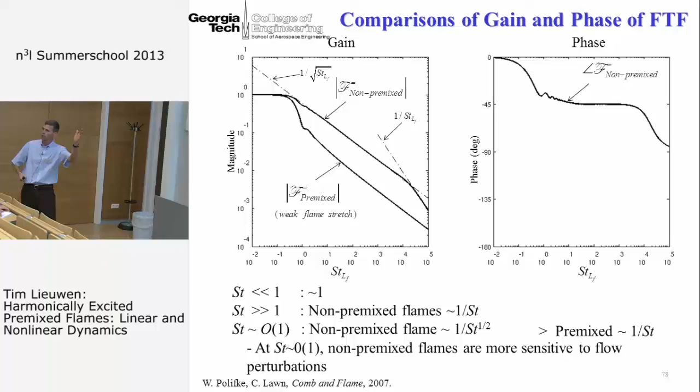One other thing I want to point out here, and this is my second to last slide, is you get actually a 3-zone region for non-premixed flames. For low Strouhal numbers, the transfer function is around 1. For high Strouhal numbers, it goes as 1 over ST. That's right here. But you get this intermediate zone where the transfer function goes as 1 over the square root of ST, which shows up because of that diffusion operator. Whereas for a premixed flame with weak flame stretch, it looks more like this, where you only have 2 zones, 1 and 1 over ST. Non-premixed flame, you have 3 zones.

Okay, so I think I've used up my time. Now, things start to get a little bit more interesting. I've talked through in detail what's happening when you have bulk flow disturbances to the heat release. You can add a whole other degree of freedom to this when you start looking at disturbances with some spatial variation, like when you have convecting vortices in these gain curves. You start to get interference effects controlling what's happening locally, and then you start integrating over that spatially to give you the heat release. You get even more stuff going on.

I think I'm just going to stop there. It's because it's getting warm in here.

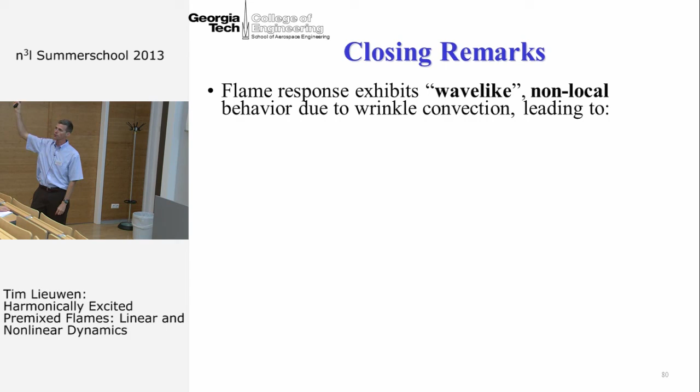Let me just wrap up with 3 bullets here. First of all, just to emphasize, the flame is a non-local operator. What's happening to the flame here is not just a function of what the excitation is here. It's a space-time convolution of everything that happens upstream. The flame is non-local, and you get this wrinkle convection. This wrinkle convection leads to maxima and minima in your gain curves. It gives you this interference phenomenon that I talked about. It also gives you the 1 over F, or the 1 over Strouhal number, behavior in your global heat release transfer functions.

And then finally, if we turn our attention to the global heat release, the role of area and weighted area and mass burning rate is totally different for premixed and non-premixed flames. So you have to think about them differently when you start thinking about the heat release. And that was it. Thank you.